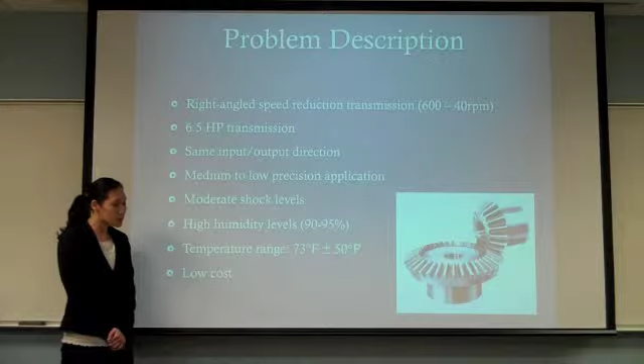Our design objectives include reducing speed from 600 to 40 RPMs while transmitting 6.5 horsepower. For our shafts, both the input and output shafts have to be moving in the same direction. We are applying this to medium to low precision applications with moderate shock levels and high humidity levels of 90 to 95%, with temperature ranges between 73 degrees Fahrenheit plus or minus 50 degrees. Also, we expect our design to be a low-cost application.

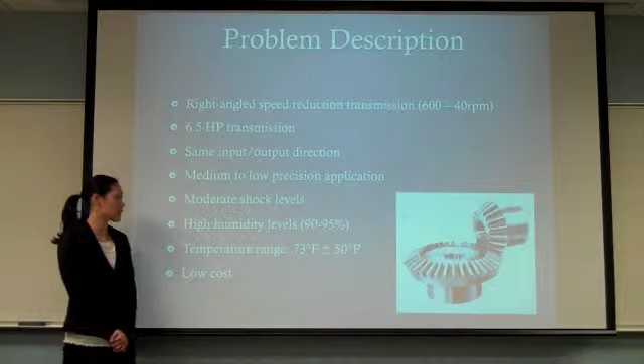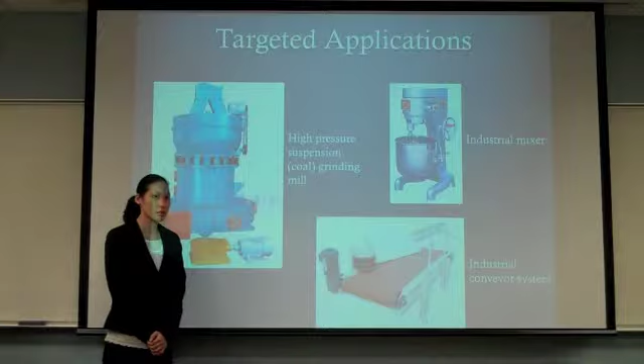Some of our targeted applications, as you can see, are high-pressure suspension grinding mill used in the coal industry. Right here you can see in orange the right-angle transmission system. Over on this side, we also have industrial mixers used in the food industry. And in packaging, this is an industrial conveyor belt system with the right-angle transmission right here.

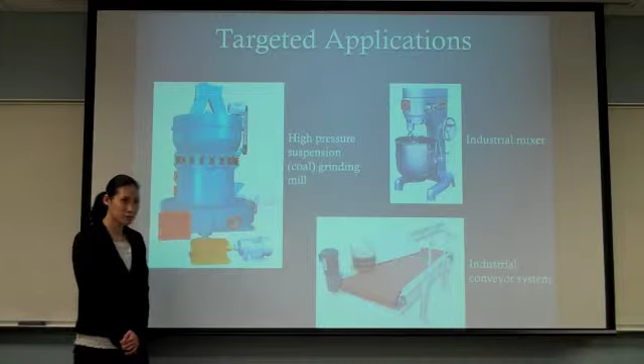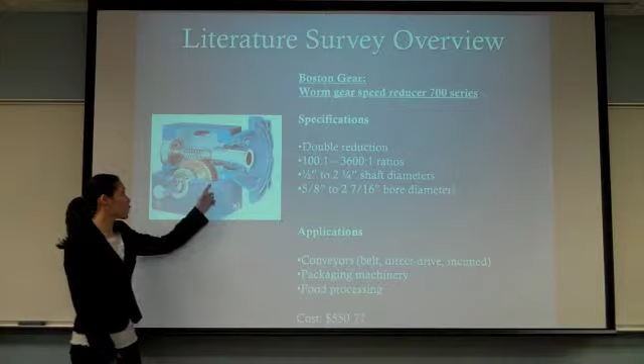For our literature survey, we found many different designs and applications. The first one comes from Boston Gear. They use a worm gear transmission system. It's two-stage, so it's double reduction. Some of the applications include conveyors, whether they be belt, direct drive, or inclined, packaging machinery, and also the food processing industry. The minimum cost for this was $550.

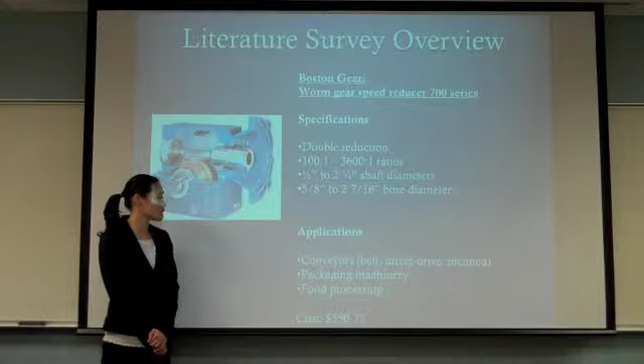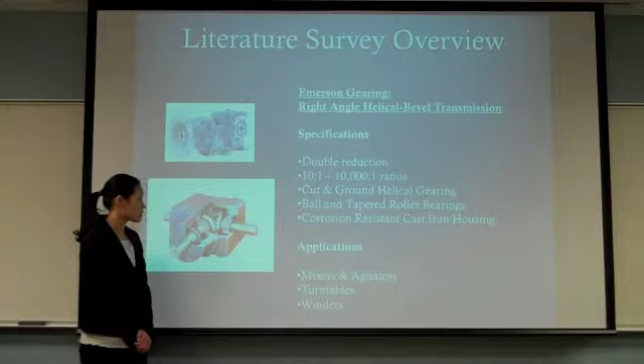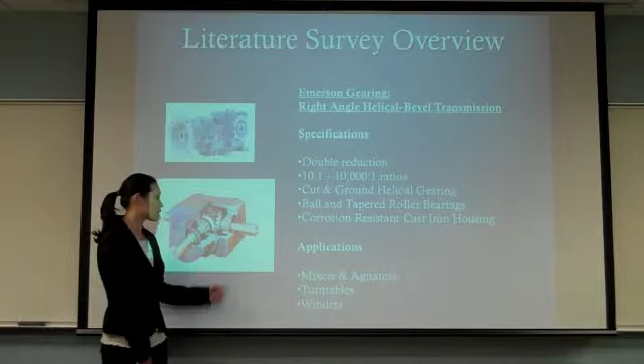Our next design comes from Emerson Gearing. They chose to use helical bevel gearings, also two-stage double reduction. In their design, they use ball and tapered roller bearings and corrosion-resistant cast iron housing. Some of their applications include mixers and agitators, turntables, and winders.

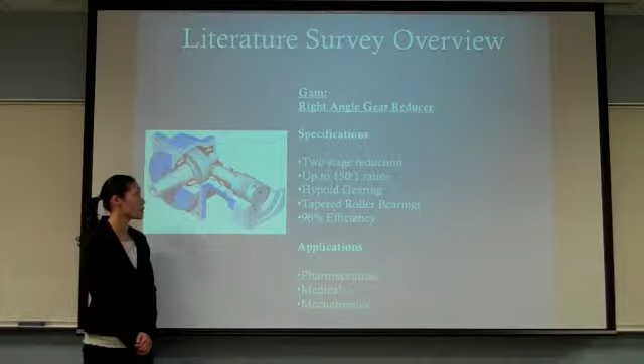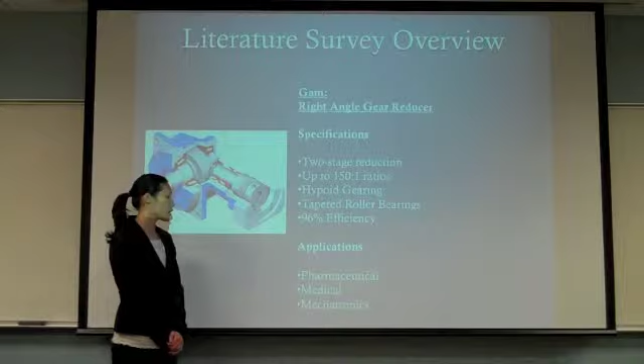And our third design comes from a company called GAM. They decided to use hypoid gearing, which gives a 96% efficiency. They also use tapered roller bearings, and their applications include pharmaceutical, medical, and mechatronic applications.

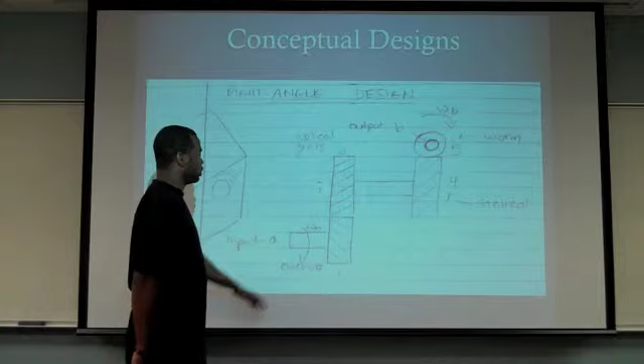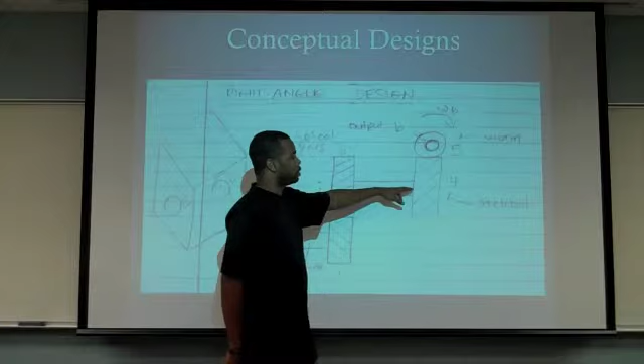Conceptual designs. As you can see, we have a simple design here. We start off with our input shaft and input gear, which is a helical gear going clockwise. We have the reduction gear, which is also a helical gear, which is going to be going counterclockwise. Then we have our fourth gear, which is a helical gear, and we have our fifth gear, which makes the 90-degree turn, which is a worm gear.

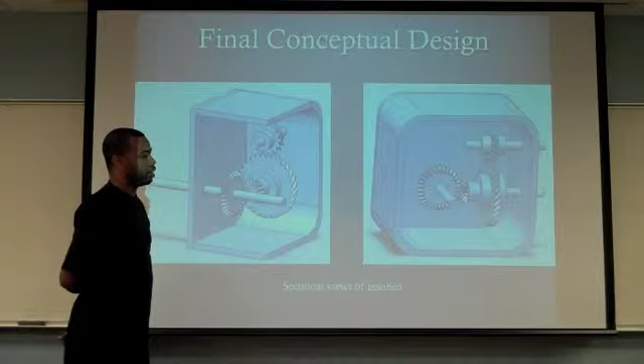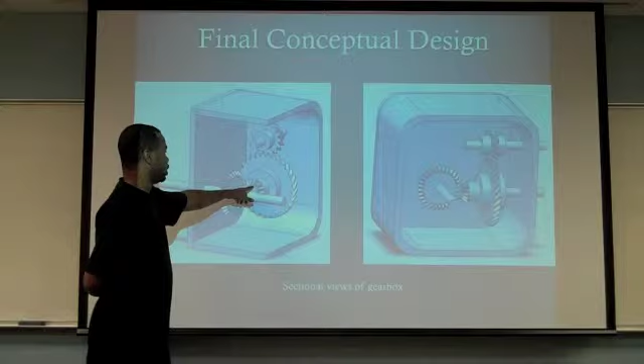Now, for our conceptual design, after doing research and calculations, as you can see, we changed our last and final gear, which is the output gear, from a worm gear to a 90-degree bevel gear. This is because during our research, we discovered that bevel gears are more efficient than worm gears. Bevel gears have an average of 96% efficiency over a wider range of load ratios. So this is the input gear, which is a helical gear, the reduction gear, which is also a helical gear. Then the 90-degree is made by two bevel gears connected to the output shaft.

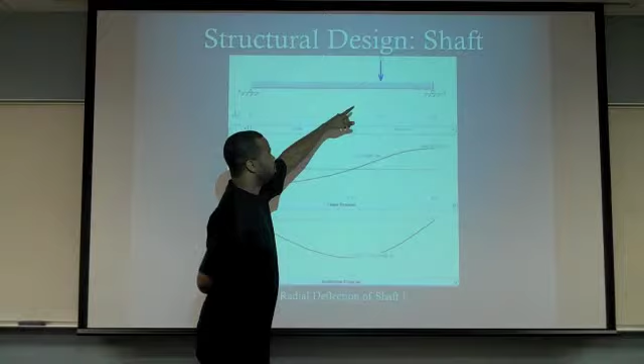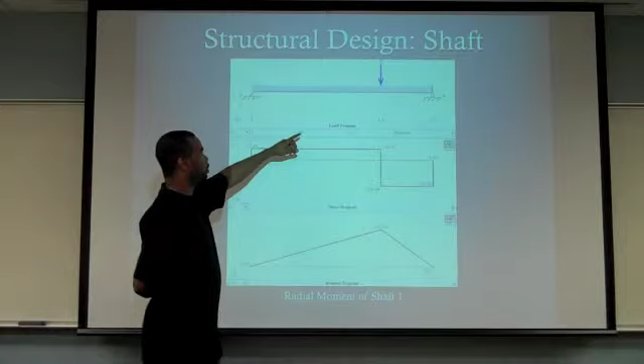Now, how we got our deflections and moment diagrams, we use a system called MD Solids. In this system, we took our shaft and we put it as a beam. We put the supports acting as, our bearings act as supports, and the load is the load from the gears. This is for the radial load, and this is the deflection that was calculated. This is the same radial load, same position, and this is the moment diagram using the same system.

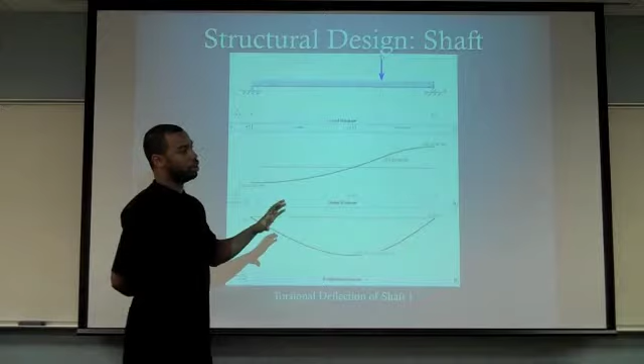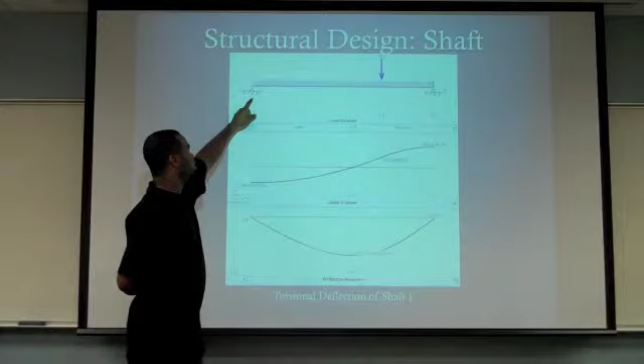Now, for our torsional, what we did was we took the radial load and multiplied it by tangent of the pressure angle, which in this case we use 20 degrees as our pressure angle. Again, we have the shaft acting as a beam, the bearings acting as support, and the torsional load, and this is our deflection diagram. And same load and torsion with the supports, and this is our moment diagram.

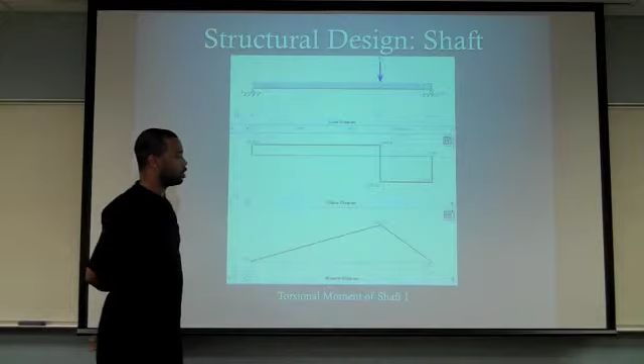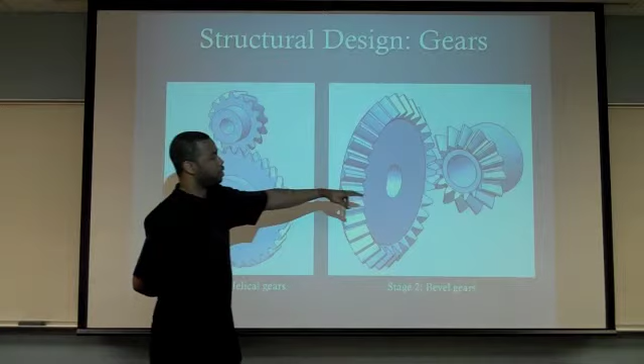The structural design of the gears: for the first stage, like I said, the input gear is a helical gear, followed by the reduction gear, which is also another helical gear. Then we have our bevel gears, which creates the 90-degree turn in stage 2. We use single row tapered roller bearings with a bore size of 3/4 inch, made of bearing steel. A tapered roller bearing was used because it could handle the combination of radial load and thrust load.

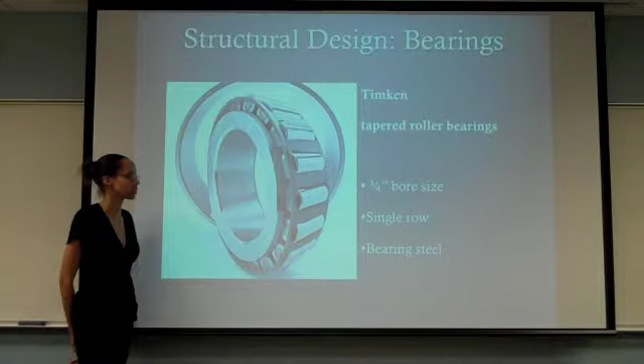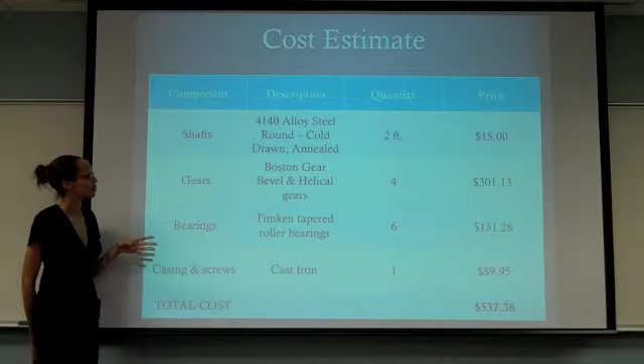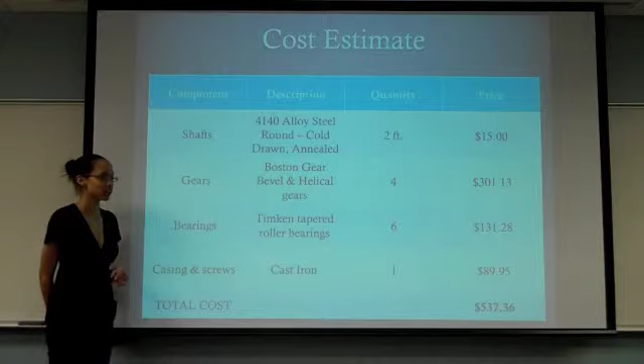This is a cost estimate of our transmission system. We used 2 feet of 3/4 inch alloy steel for the shaft, and that came up to $15. All 4 gears came up to about $300. The tapered bearings, 6 of them, came up to about $130, and the cast iron casing was approximately $90, which gave us a grand total of $537.

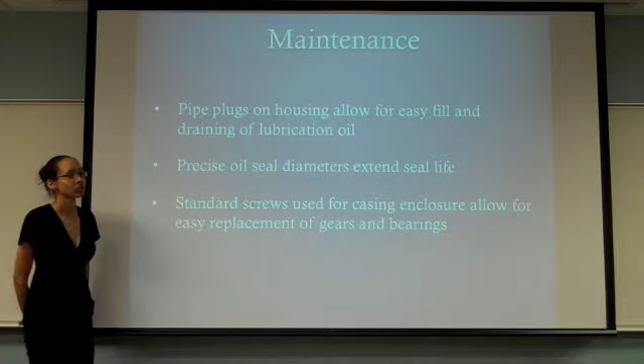For maintenance, we included pipe plugs on the housing to allow for easy fill and draining of the lubrication oil. The oil seal diameters had to be precise to extend the seal life, and lastly, standard screws were used for the casing to allow for easy replacement of the gears and the bearing.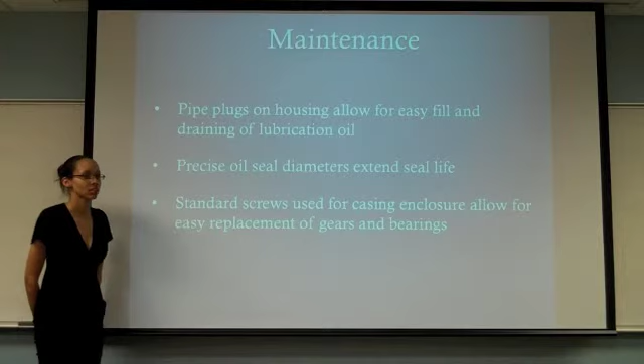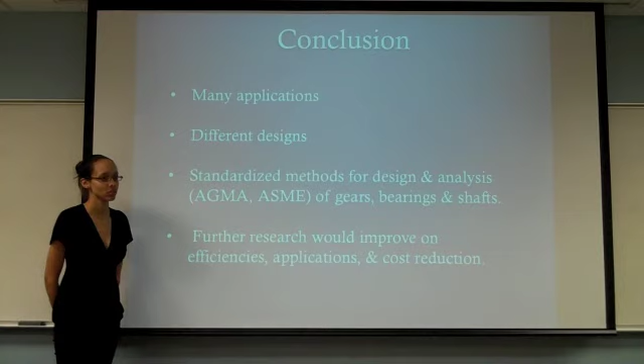In conclusion, there are many applications for the right-angle transmission system, from the medical field to the heavy industrial field. There are also many different designs for this transmission system, using a worm gear, bevel gear, hypoid, etc. Standardized methods for the design and analysis of the gears, bearings, and shafts were used using AGMA or ASME. And further research would improve on the efficiency, applications, and would also reduce the cost of such a transmission system. Thank you very much.